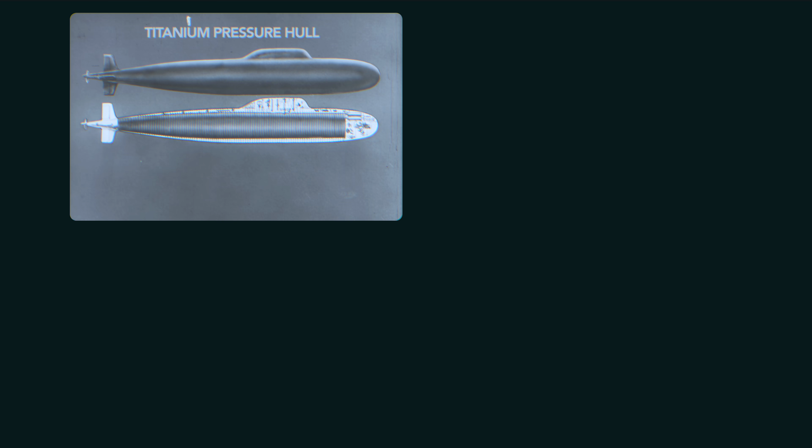A generational leap forward in material science, nuclear engineering, and computer automation. But this new superweapon will end up being more than the Soviets bargained for.

In the late 1950s, the Cold War intensified as the United States and Soviet Union raced to gain the upper hand beneath the oceans. The Soviet Union's strategy was simple: build as many submarines as possible. Attack, guided, and ballistic missile subs poured out of Soviet shipyards. By the mid-1960s, the Soviets would have more than twice as many submarines as the United States.

But the numbers weren't telling the real story. Below the surface, American crews could stalk Soviet subs for hours, even days, without ever being detected. For Soviet crews, it was the opposite. American submarines had seemingly vanished from the oceans. Over the previous decade, U.S. naval engineers had developed sophisticated stealth technologies like dampeners, precision gearing, and advanced propulsion that made their submarines much quieter.

By comparison, Soviet technology had fallen behind. Machinery sent vibrations through their hulls, reduction gears rattled with noise, and propellers, cast with less precision, shredded through the water. Soviet military planners faced a chilling reality. If war ever broke out, the Americans could find and destroy Soviet submarines before they had a chance to strike back.

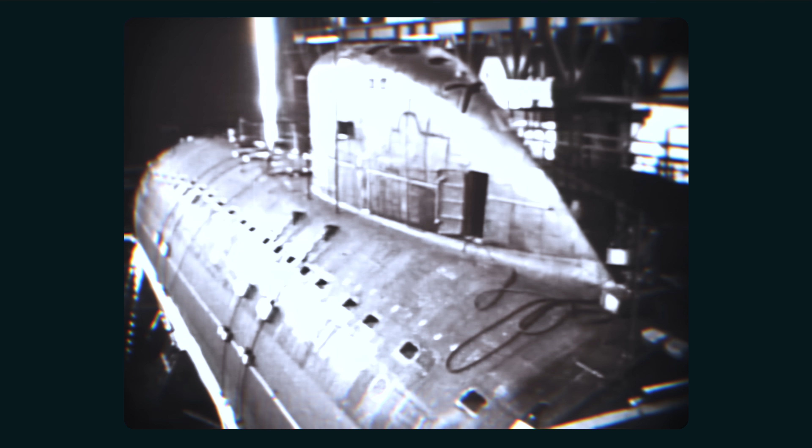The Soviets understood the problem. When it came to stealth, they were at least a decade behind the Americans. Simpler design and construction had allowed them to build submarines faster. But now, quantity over quality looked like a mistake. So what do you do when you're caught in a fight you can't win? You change the rules.

In 1960, work began on a radical new submarine, built not around stealth, but raw performance. The first objective was sheer speed, at least a third faster than any American submarine. Next, maneuverability. American submarines needed 2 to 3 minutes to execute a 180-degree turn. Soviet engineers would aim for 40 seconds. Finally, raw acceleration. From a dead stop to full speed in under a minute.

A burst of velocity so extreme it would overwhelm tracking systems, allowing Soviet crews to close in at blistering speeds, strike with overwhelming force, and escape before the enemy could react. It was an asymmetrical response, a submarine that would make stealth obsolete.

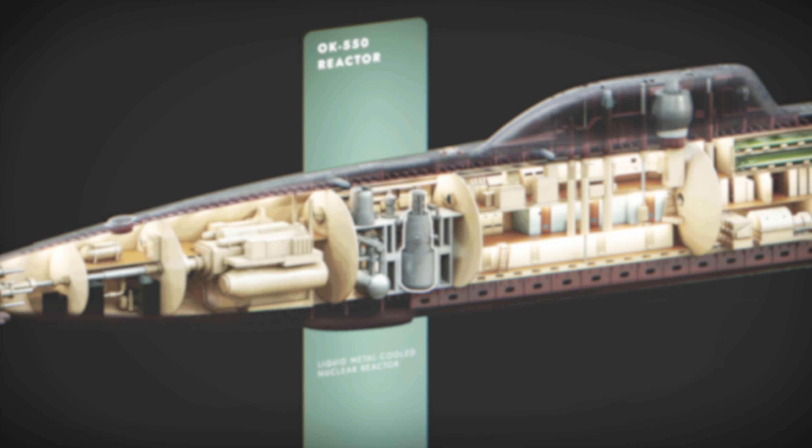What Soviet designers came up with wasn't just a faster submarine. It was a complete rethink of how they operate. At its heart was a revolutionary liquid metal-cooled reactor, delivering up to 3 times more power, allowing the sub to accelerate from a dead stop to over 40 knots in just over a minute, a remarkable feat.

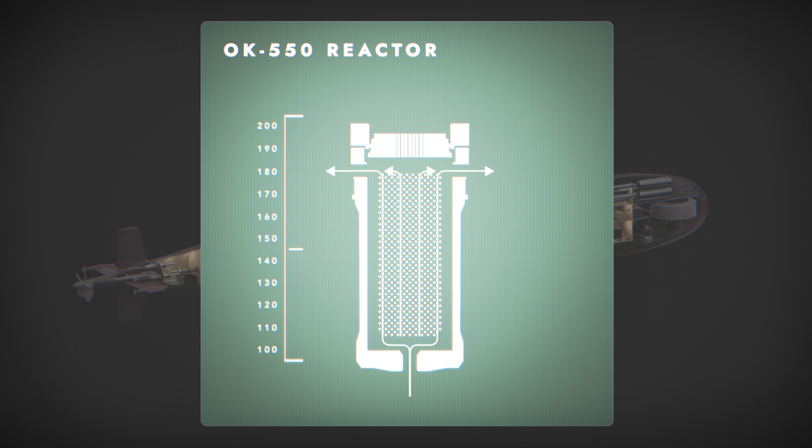But the new reactor came with one critical trade-off. It could never really be switched off. Even when idle or docked in port, its coolant would always have to be kept above 125 degrees Celsius, or it would solidify instantly and permanently destroy itself.

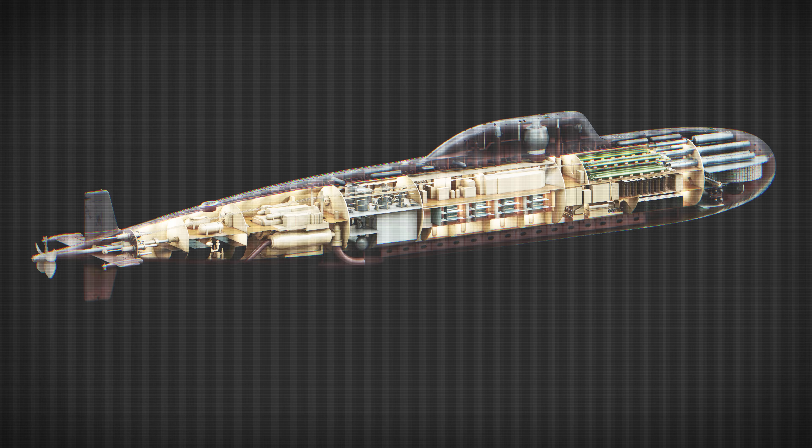But raw power was only part of the solution. The sub would also need to slice through the water, so engineers employed a radical teardrop shape with every inch smoothed over. Even the bow planes would be fully retractable at speed. To cut drag even further, the sub was made as compact as possible. But that meant having to operate with a crew barely a third the size of a typical attack sub.

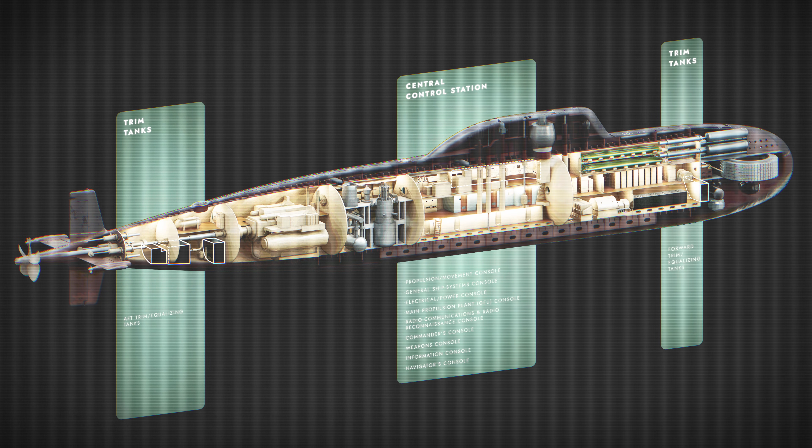The solution was unprecedented automation. For the first time, computers would manage propulsion, ballast systems would adjust themselves, and torpedoes would load automatically. Navigation, sonar, and target acquisition would all be integrated into one central command system.

And the entire pressure hull would be built out of titanium, 40% lighter than steel and far stronger pound for pound. It would allow the sub to dive deeper and survive depth charges that would crush conventional steel. What would emerge was a machine decades ahead of its time, built to outrun, outdive, and outmaneuver its rivals. But only if it all came together perfectly.

The first hint that the Soviets were up to something came from intelligence sources reporting that new submarines were leaving assembly sheds at the Leningrad shipyard. But their hulls looked wrong. Ordinary steel, like the kind used to build American submarines, darkens almost immediately when exposed to the elements. These were highly reflective. Analysts suspected titanium, but it seemed impossible.

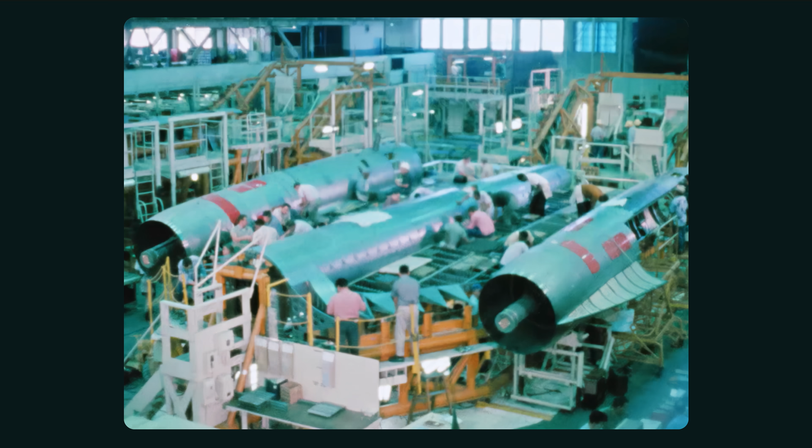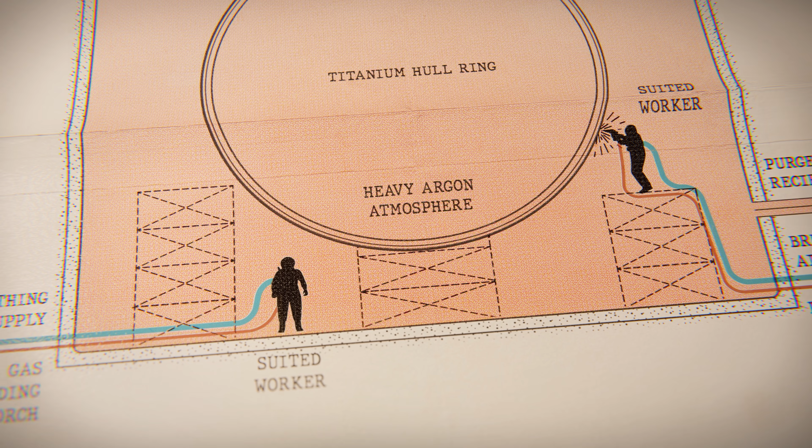Titanium was difficult to work with. Outside of high-end aerospace programs where weight and heat resistance mattered, it was only ever used sparingly. An entire submarine would require fabrication methods never attempted at scale. Massive hull sections would have to be assembled inside giant argon-filled chambers, hermetically sealed environments. To many, the thought of a dirty Soviet shipyard with welders fumbling around in spacesuits seemed comical.

But if the Soviets were using titanium, the implications were staggering. A sub with a lighter and stronger hull would move faster, dive deeper, and survive pressures that would crush conventional steel. Analysts estimated diving depths of up to 1,000 meters, wildly beyond anything else in existence. NATO's anti-submarine arsenal could become obsolete overnight. The West scrambled to respond, fast-tracking the development of deeper diving weapons, new acoustic tracking systems, and faster torpedoes. For the first time in years, the West was playing catch-up.

In 1972, the most sophisticated submarine the Soviet Union had ever built left its port on the Barents Sea. It had taken 12 years to develop, but it would lay the groundwork for the next generation of submarines. After years of playing catch-up, the Soviet Union had finally overtaken the West.

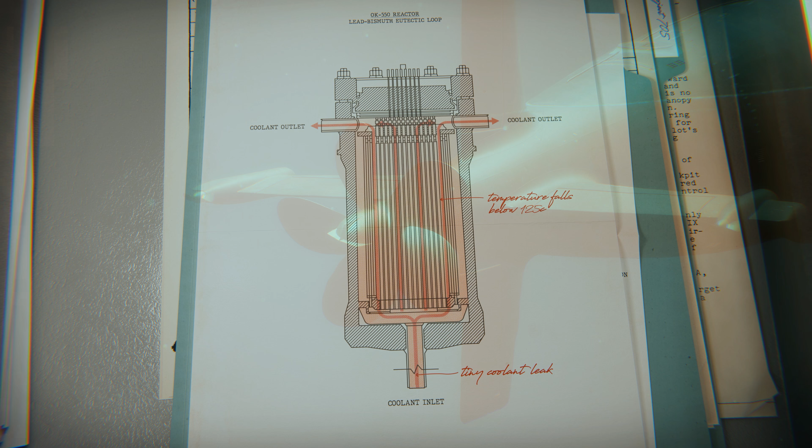Then, its liquid metal reactor solidified into one solid piece of metal. A fault in the steam generator had gone unnoticed, causing a leak and the liquid metal coolant to drop below 125 degrees Celsius. The reactor, the heart of the machine, was destroyed instantly. In the blink of an eye, the crown jewel of Soviet naval engineering had transformed into titanium scrap.

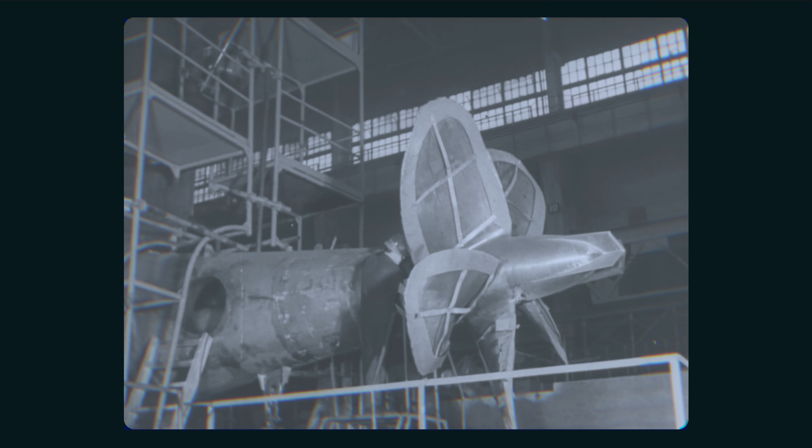It was a disaster on every level, technical, financial, and political, and the pressure to cancel the entire program was intense. But with so much already invested, development would push on. The destroyed sub was cut in half. The forward section was sent to Leningrad to serve as a dryland trainer, while the stern, with its frozen reactor, would remain in Severodvinsk. The running joke was that the Soviet Union now had the world's longest submarine. It would take another 5 years before a replacement could be built.

The Soviet Union's most daring submarine program had been troubled from the beginning. Initiated in the late 1950s as Project 705 and what NATO would later call the Alpha class, design work dragged on for 8 full years before construction of the first submarine could begin. Once complete, the first sub was meant to undergo extensive testing, clearing the way for mass production. But that's not what happened.

Instead, Soviet leadership, panicked by increasingly stealthy American submarines, ordered the immediate construction of additional Alpha subs before the first one was even finished. Pushing an unproven design into serial production without even testing it was a huge mistake. From the start, the subs were riddled with technical problems. Automated systems failed regularly, overwhelming crews.

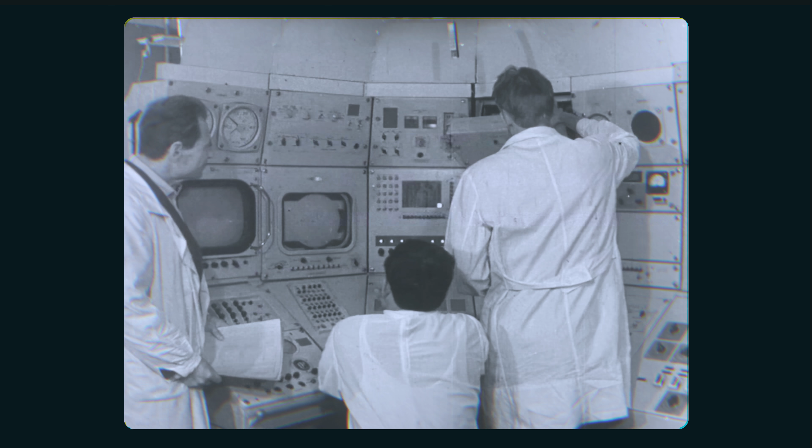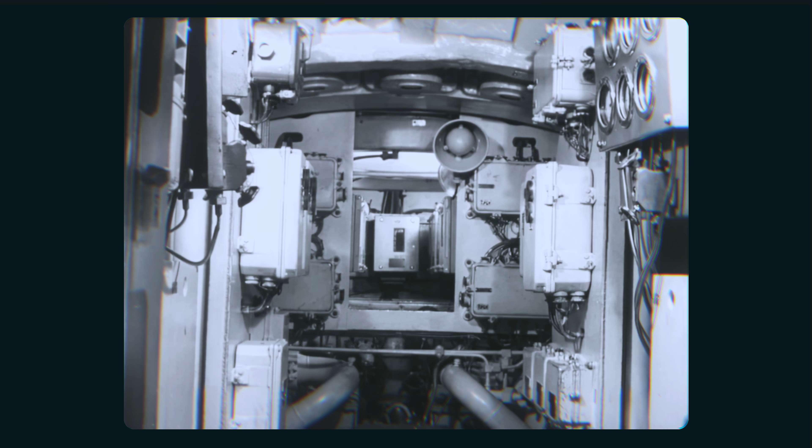Specialized port facilities, with equipment to keep the liquid metal reactors continually above 125 degrees, were either never built or proved even more unreliable than the submarines themselves. It meant crews had to remain on board to keep the reactors continuously running. This constant operation, never envisioned by designers, made critical maintenance almost impossible. Engineers had planned for cruise and ballistic missile variants, designs that might have seriously threatened American carrier groups, but the endless cascade of technical setbacks kept them on the drawing board.

By 1978, after a decade of setbacks and one catastrophic failure, the Alpha was finally ready. 6 more submarines entered service with the Soviet Navy. Not the 30 originally planned, but these were 6 of the most advanced attack submarines the world had ever seen. And they were kept on high alert at Soviet bases, ready to defend the Soviet Union's Arctic bastion.

American commanders who encountered Alphas described the experience as visceral. They could outmaneuver and change position at breakneck speeds, dive deeper than any weapon could reach, and accelerate like nothing else in the ocean. But that speed came at a price. At 40 knots, the cavitating propeller and rushing water created so much acoustic interference that the Alpha's own sonar went blind. The submarine wasn't hunting, it was screaming, and the reactor that could never really be shut down turned into a maintenance nightmare. It meant that the subs spent more time in repair than out on patrol.

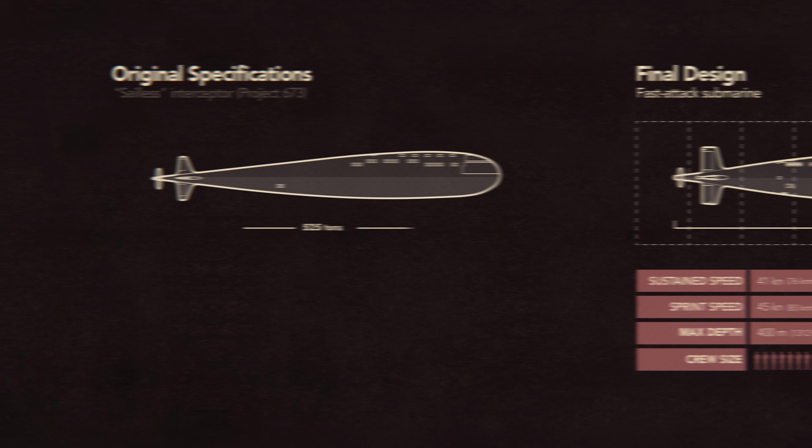Each Alpha had cost twice as much as a conventional nuclear submarine. And the program also forced the Soviets to develop an entire titanium industry, new fabrication methods, and push nuclear thermodynamics to its breaking point. All for just 7 submarines that barely worked. The scale of the failure was staggering, until you learned the truth. The Soviets weren't trying to build a better submarine. They were trying to invent an underwater fighter jet.

Because translated records from its designers revealed that the submarine the world saw wasn't the submarine the Soviets were supposed to build. The Alpha was just the first piece of something much bigger, a revolution in naval warfare that almost happened, one that could have jeopardized the US Navy's surface fleet and even its aircraft carriers.